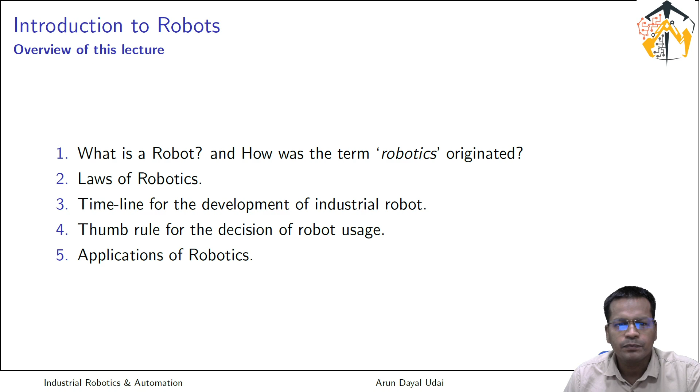Thumb rule for the decision of robot use is very important - when you should choose a robot, what type of robot for a particular application, this is covered in this module. We'll also discuss different applications of robots. So till module 5 we'll cover today, and then move further in the next class.

So what exactly is a robot? Where did this term originate? Most of you probably already know by now, given your curiosity. But formally, a robot is an automatically operated machine that replaces human effort, with or without human resemblance. That means your notion of a Star Wars type of robot falls here. With this formal definition, it may not look like a human at all - it can be just a human arm, or sometimes not even a single moving part, and that can also be a robot. It can be just a screen with some animated creature coming on it, like an avatar - that also is a robot.

Sometimes web bots are also there. With those definitions, it formally cannot be put into industrial robots as such. In industry, most of the physical things are there, so that definition may not be equally good, but yes, that is how a formal robot is defined.

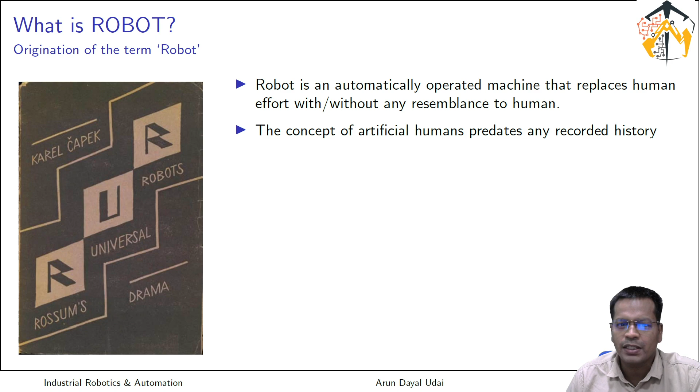Then comes the concept of the artificial human, which predates any recorded history. Actually, robots have evolved long back - it predates any recorded history, we don't even know when it came, probably in some old drama or somewhere. Formally, it has been documented that the modern term robot we normally use was derived from a Czech word, robota, meaning forced labor or a serf.

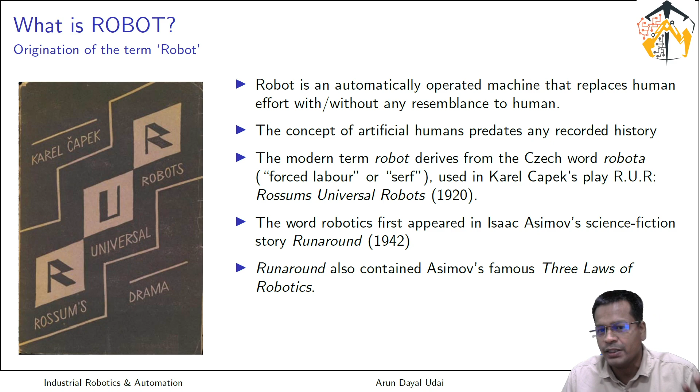It is used in Karel Capek's play RUR, that is Rossum's Universal Robots, a 1920 play. Quite a lot of inventions happen because of fiction stories, sometimes through drama, and that is how this was also conceived. The word robotics, not robot, first appeared in Isaac Asimov's science fiction story known as Runaround, which came in 1942. Runaround contained some famous laws of robotics, which were formally established and known as the three laws of robotics. So you see, a fiction work has given a formal definition finally.

So what are the laws of robotics? Asimov's three laws of robotics: first, a robot may not injure a human being, or through its inaction allow a human to come to harm. What does this signify? A robot's brain should be built such that - though commands come later - it should not injure any human around it. You cannot make a robot that kills a human, because then it doesn't fall under the category of protecting humans altogether. That is the first law.

Then comes the second law: a robot must obey the orders given to it by human beings, except where such orders would conflict with the first law.

This particular definition follows the previous one. That means a robot obeys human command, but if a robot is commanded to kill another human, it won't follow that. Or you cannot ask the robot to kill yourself. Commanding it to kill you should also not be accepted. Then comes the third law: a robot must protect its own existence as long as protection does not conflict with the first and second laws. It will protect itself, but while protecting itself, it should not kill the commander, that is you, the programmer maybe.

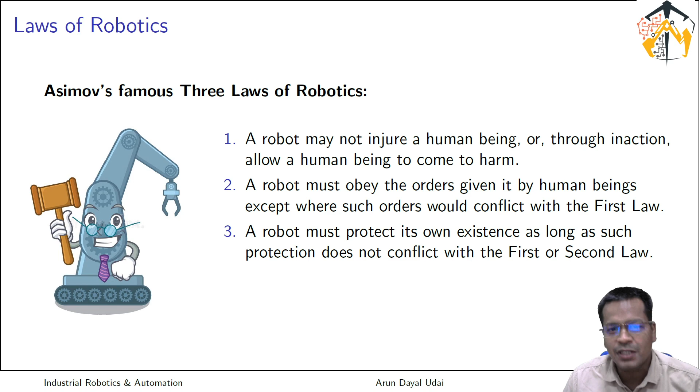Then comes the timeline of how it has evolved. The first stationary industrial robot, I call it a stationary industrial robot, looked like a robot the way it is in industry. I'll show one small robot here next to me. It doesn't look like a robot at all, more like a humanoid arm. It's just an arm, you can move it, it has some axes, it picks an object from a place and puts it somewhere else. This is how it is.

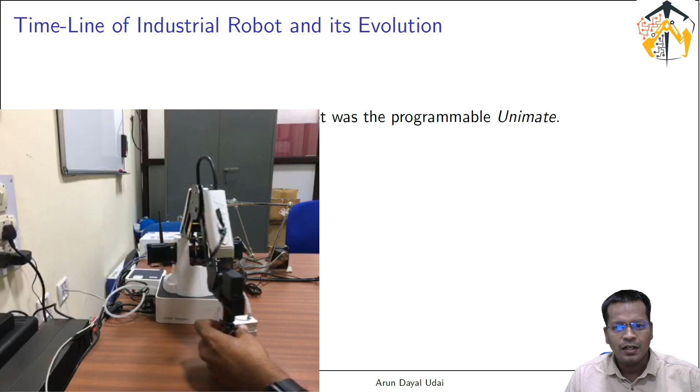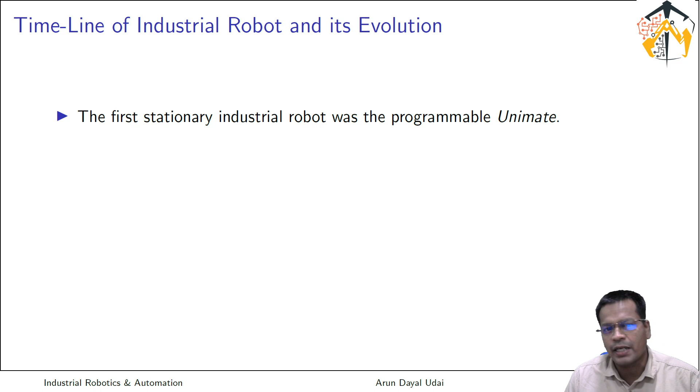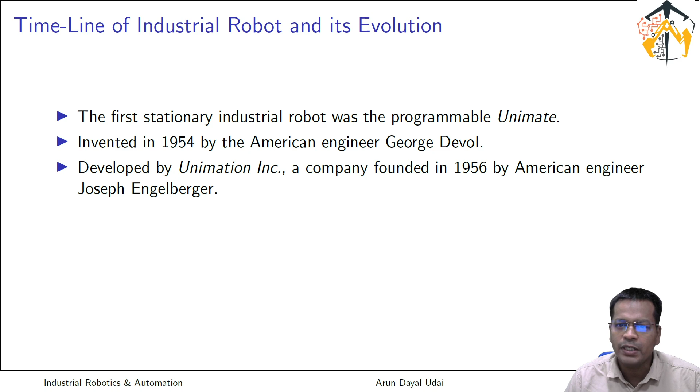So it is a stationary robot and it is programmable. The first one of this kind was developed by Unimate, a stationary robot very much like a human arm. It was invented in 1954 by American engineer George Devol. Later it was developed by Unimation Inc, a company founded in 1956 by American engineer Joseph Engelberger. So although Engelberger is known as the father of industrial robots...

This is not a mobile robot, not an underwater robot, not a drone. This is an industrial robot, mostly arms as it exists in industry. Nowadays it can take other forms, I'll show and discuss that as well. The first prototype of such robots was introduced in 1959 at General Motors Corporation as a die casting factory in Trenton, New Jersey. That was the first commercial one.

And the world's first production line serial robot - why is it called serial? It's just like our arm: it has a shoulder joint, an elbow, a wrist joint, some fingers. So it is serially connected and it terminates. It is not a closed loop, not a 4-bar mechanism, it is just a serial chain, an open loop chain, very much similar to that. This kind of serial robot was delivered to a General Motors factory in 1961 by Condec Corporation, which is nothing but an acquisition of Unimation Inc.

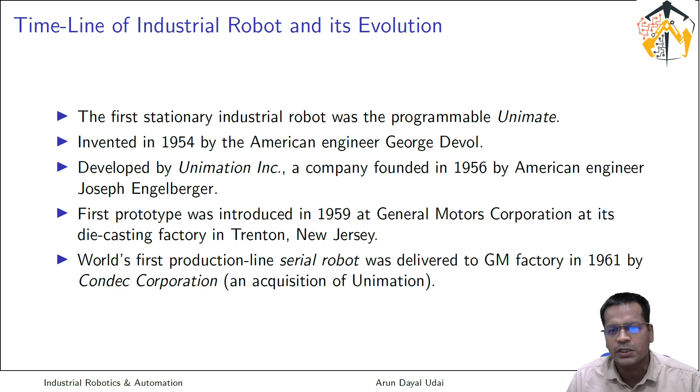So where should we apply a robot? These are well-posed questions quite often asked to us: where should we use this, can we use it anywhere we feel like, should we use it at all? Mind it, normally we prefer using robots for dirty tasks, any task which is dirty. These are known as the 4Ds.

Dirty means something very dirty, like a forging operation, maybe a machining operation, or sometimes in a casting factory, sometimes in painting. I'll show some applications also. Painting is a very dirty task - if you paint, you yourself get dirty. Buffing, polishing, and those types of tasks which are dirty in nature, or a dull work.

Dull work means as soon as you joined your duty, whole of the day you were just picking up an object from the conveyor, putting it into a carton, and moving it to another conveyor. So if you do such a repeatable task, what will happen to you? You will feel fatigue. Your whole day you did nothing but pick up an object and put it somewhere. That is a very dull task.

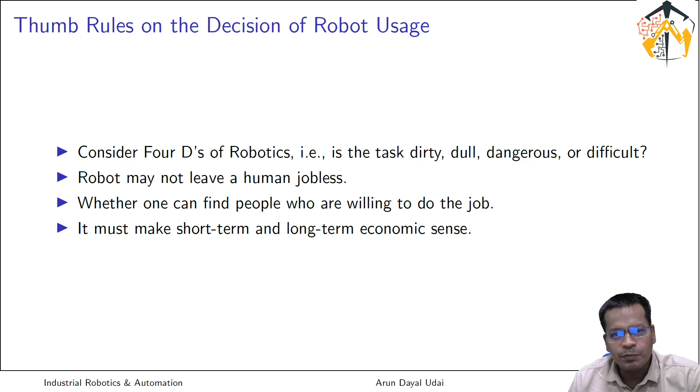And it must make short term and long term economic sense. That means immediately you are not paying hugely for that particular robot, or over the year you are paying for its maintenance. So, short term and long term, it should be economical to the industry.

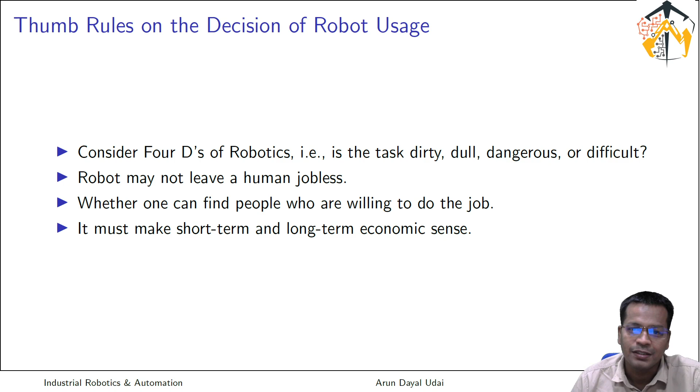It's not just precision which matters. Yes, it does matter - if it is so precise, then it is a difficult task, so it falls under the 4D category, right? So that is a difficult task.

Then I'll discuss some applications which are generally there in industry, without going much into general applications as a robot. I'll immediately show you a small video which shows some applications. This is a standard video quite easily available over YouTube, just one example. So you see, in industry it is used for...

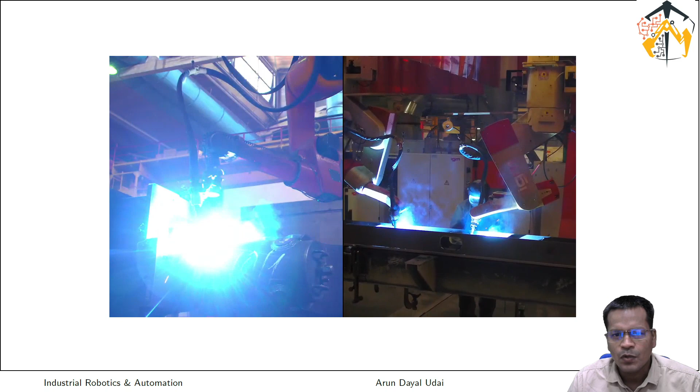Arc welding for precise, repeatable welding. Spot welding, where two plates are joined together or a frame is joined with the car chassis. Material handling - picking an object from a place and putting it somewhere else. That is what is being done here.

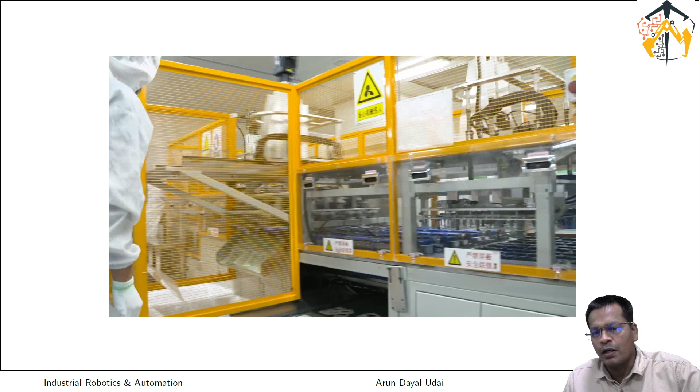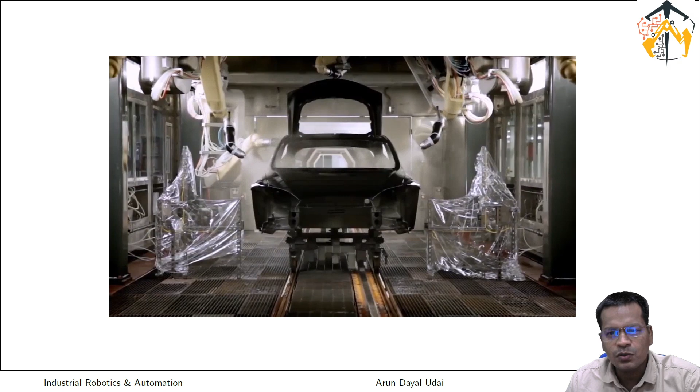Machine tending, yes - what happens is you pick a tool and put it to a machine which does machining. That tool can be placed as a cutting tool or something like that. It's a painting task which is done - this is quite common in industry. You see how dirty it is.

Picking, packing, palletizing - it's a repeatable task, and again it is very, very monotonous.

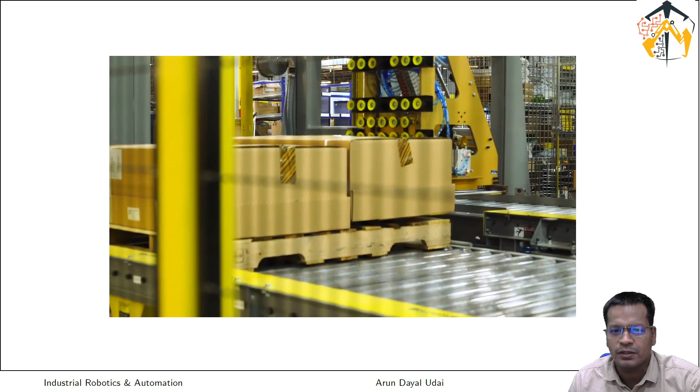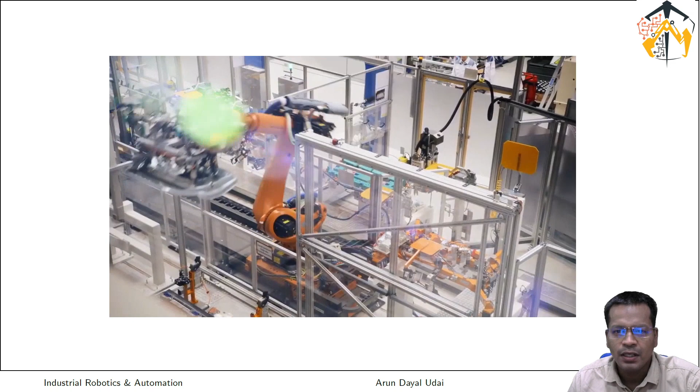Got it? This is palletizing task and assembly, one of the less seen applications in the industry. Assembly is when two or more parts are put together, probably welded or assembled using some fixture, laser cutting, and so on.

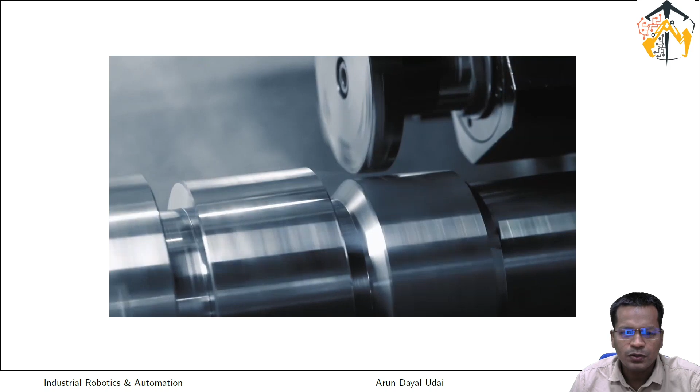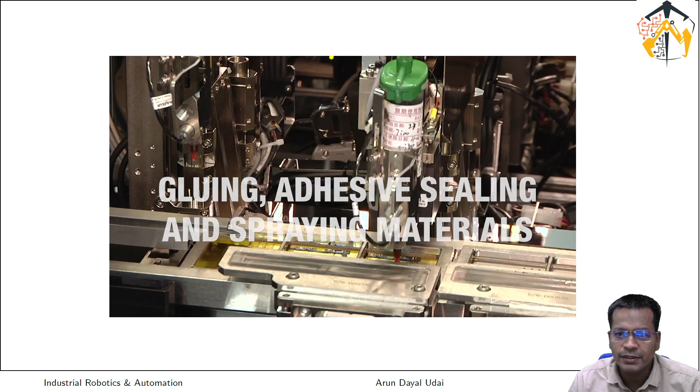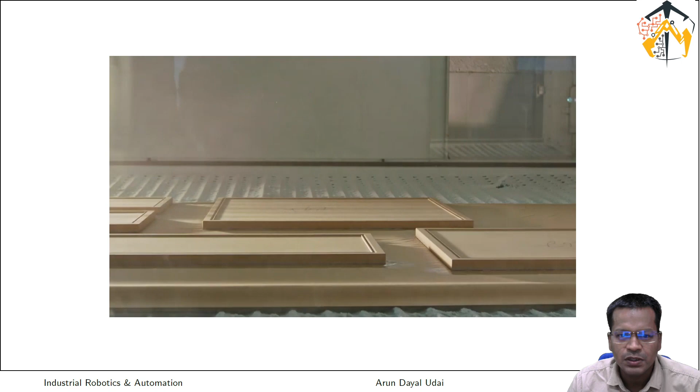These are some common applications in the industry: grinding, polishing, gluing, adhesive, sealing. They do it quite uniformly. This is spraying, and other processes are also there, like assembling in PCB.

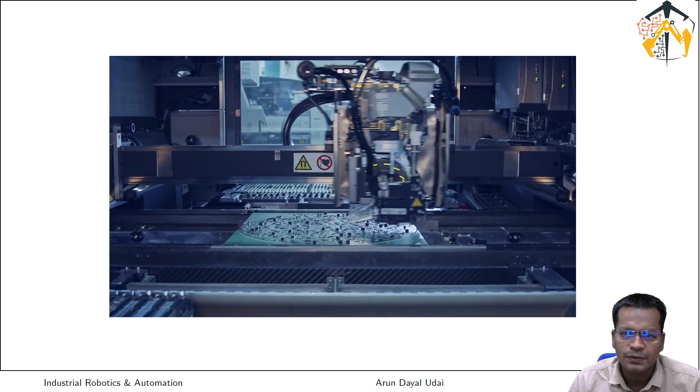While machining, it can do something. Yes. Electronic assembly, PCB assembly. That's all.

So these are some applications in the industry, primarily in the industrial shop floor. Otherwise, it can be used as medical robots, a typical example being the Da Vinci robot, which is very popular, though there are many others for specific purposes. It is also used in mining.

This is the Julius mining robot. What it does is pick up samples and do some surveying operations underground.

NASA space robot is there. Not just NASA, many other space stations have special robots. It has a huge boom, sometimes used to dock two space shuttles together.

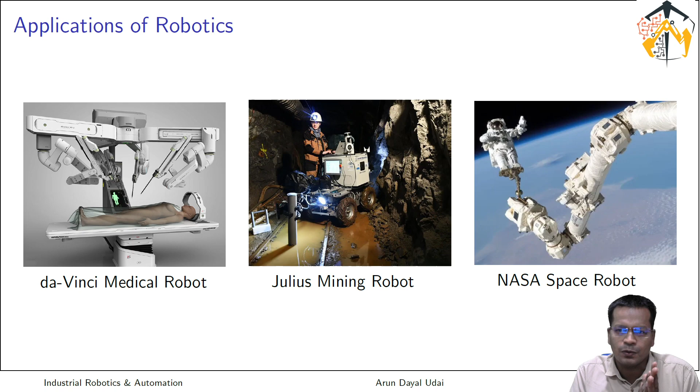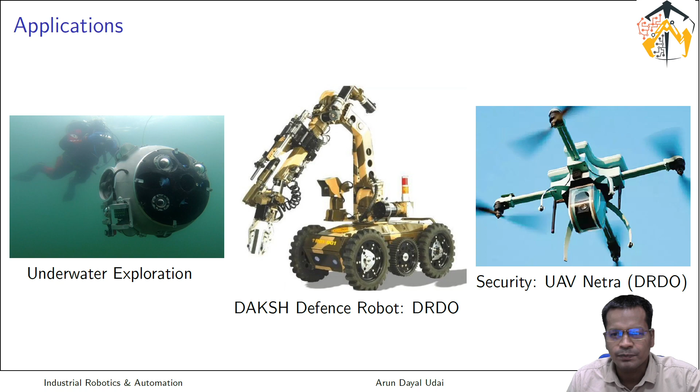It is used for defense, developed by DRDO, mainly as a bomb defuser. UAV Netra, maybe covered in some movies, is a standard drone-like creature which does cross-border surveillance. Both are developed by DRDO.

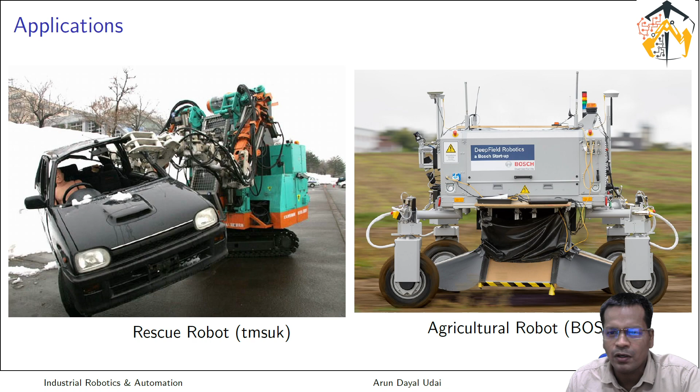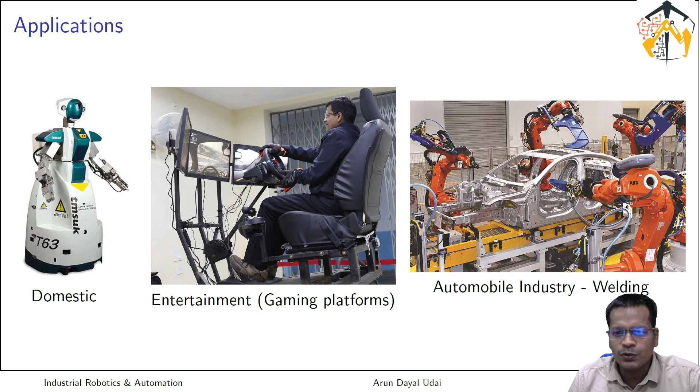In the automobile industry, just now in the video you saw it doing some spot welding operation. There are many more applications - material handling, palletizing, packaging, processing, welding (spot and arc), surface finishing like polishing, buffing, grinding, deburring, painting, machining and drilling, and assembling. Collaborative robots do assembling, which needs some compliance - a special category known as cobots, which has many other features. While doing kinematics and dynamics, we'll come back to this special type of robot for more insight.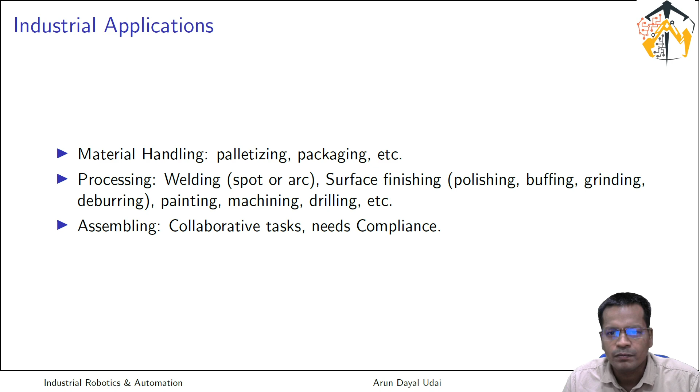Now I'll get into what exactly goes into defining a particular industrial robot, as you just saw. What all things make up an industrial robot? This is not just for a serial robot arm, it can be for any industrial robot. So how is it made up?

I'll switch on the camera once again for the serial robot. So it has an arm, number one, mentioned here. It is controlled using a bottom unit that you can see - this base has a controller. In industry it's a different setup, nomenclature as number 2, the controller, which has software inside. For a domestic or tabletop robot like this, everything is there down below. Got it?

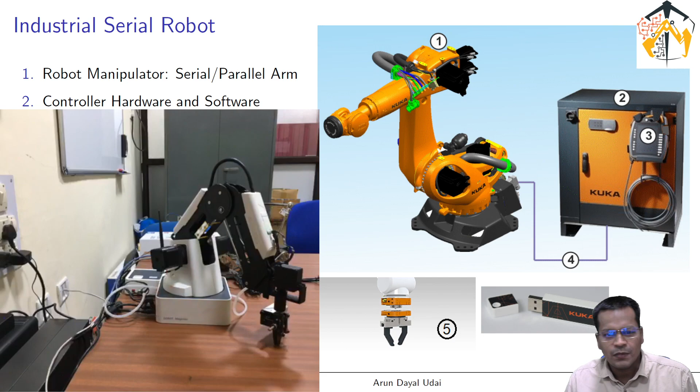Then comes the controller, and on top of this there is a teach pendant. What is it used for? It is used to program a robot.

For domestic robot and tabletop robot, programming can be done using a desktop PC, but in case of industrial robot, it is a teach pendant. It has a long wire which can be dragged till the robot end effector, and then you teach it. You take the robot to a place, teach that location, then teach another location, and trace the whole thing. That can be done. It is used for teaching, sometimes for programming also, jogging operation, calibration operation, testing operation, everything can be done using that particular thing. We'll talk about teach pendants in detail later on.

And then it is constructed. Sir, suppose the equipment has a joystick attached to a teach pendant, that can be considered as- yes, it is normally attached. I'll show you my teach pendant in detail just after this slide. Please wait. So that has a 3D joystick, a 3D mouse type of thing, which is used to jog your robot.

It jogs to XYZ roll pitch yaw, three translation and three rotation - that is a 6 degree of freedom mouse. So that is always there with the teach pendant in the latest thing. Okay, so that is there.

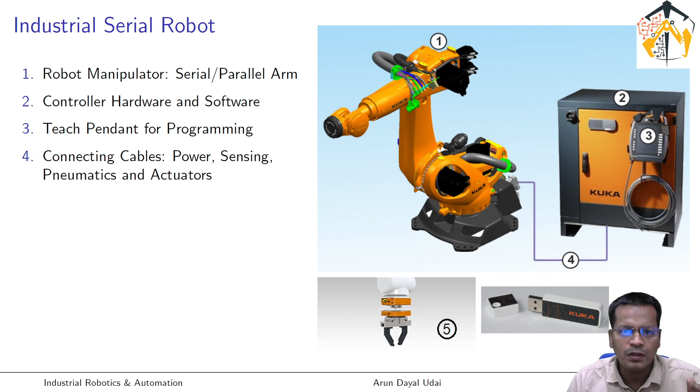Connecting cables connect different things together. It connects the sensor, it connects the power, it connects the signals. So those are connecting cables.

It can be a pneumatic cable also, which supplies pneumatic supply to end effector. Professor Jaffer will discuss much more in detail while he discusses pneumatics and hydraulics during the automation portion of your syllabus. We'll talk back to this when we see how things are integrated together in pneumatics and electronic things. The robot here is electrical electronics, but quite a lot of things are compliant, and those things are pneumatics. He'll talk in detail, don't worry, he'll come back to this.

So you also have some pneumatic cables. That also is there, and you have plenty of actuators which need power, which have signals. So those things are there.

Number fifth is end effector tools. End effector tool can be a polishing tool. Just now you saw in the video, which can do polishing, which can do grinding, it can do spot welding. So tool differs from application to application, right? Over here in fifth number, you see it's a two-fingered gripper. Just a two-fingered gripper, it has nothing else. So that is known as end effector tool.

By default, robots are not delivered with that tool. It is delivered just with a flange. You can attach different types of tools depending on application to application, right? So that is what a tool is.

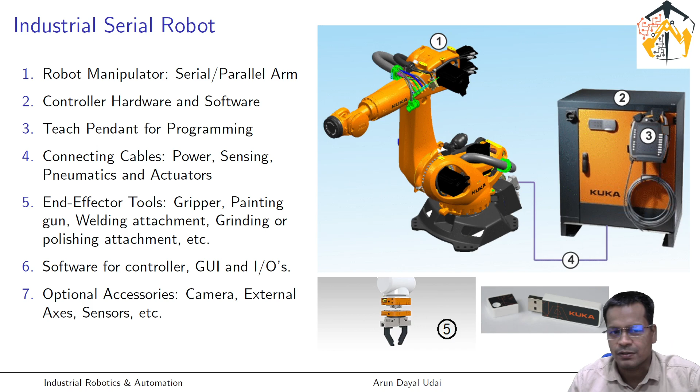That can be done. Sensors, external sensors can be there, it can be a proximity sensor if you want. Nowadays plenty of sensors are there by default. Some are implicit to the robot, some are explicitly attached, like safety sensors. Your robot is in a cage, normally in industry, so as soon as you enter that cage, the robot is slowed down or stopped completely. That is through an external sensor. These are optional.

Now I'll discuss in much more detail what things are there. So just now I showed you a few.

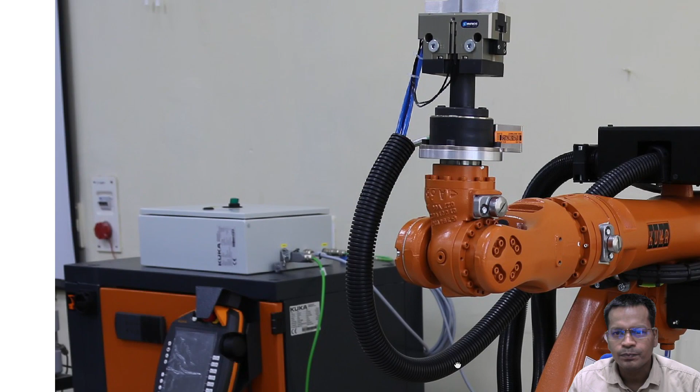This is a two-fingered gripper, a Schunk make. It is attached on top of a robot flange, but there is something in between - this is a load cell. What can it do? It can feel the forces that come on the gripper. This is not a regular attachment, this is for a special purpose robot. It looks like this.

And then these are the actuators, rather the motors. Motor with the gearbox and transmission is known as an actuator. We'll discuss actuators in much more detail in the next module. This is the top box where you have some valves fitted.

The blue wires, all the blue lines, are pneumatic lines, so this is a pneumatic gripper. All the valves to operate the pneumatics are over here, whereas the black cables you see are electrical cables. And the green cable here is the communication cable. So each cable has got some color coding.

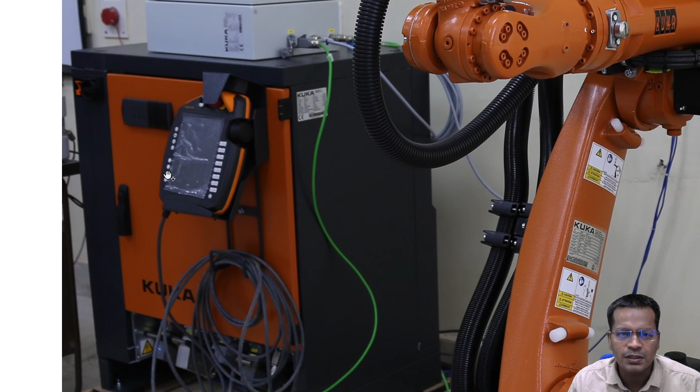This is your controller, a standard industrial controller. On top of this is a teach pendant - I'll show you in much more detail once again. This teach pendant has an extension cable. So now I'll expand on this teach pendant.

Just now you saw that, I'll show you what you just asked. This is a 3D mouse, used to jog the robot in 3 translation directions - X, Y, Z - and rotation along those 3 axes. So this is nothing but a 6-DOF mouse.

This is the emergency stop button. This is the mode change for programming - for regular run you can change it. Standard programmable buttons - it can be a fixed programmed button that comes along with the GUI, so a few of them can be programmed buttons.

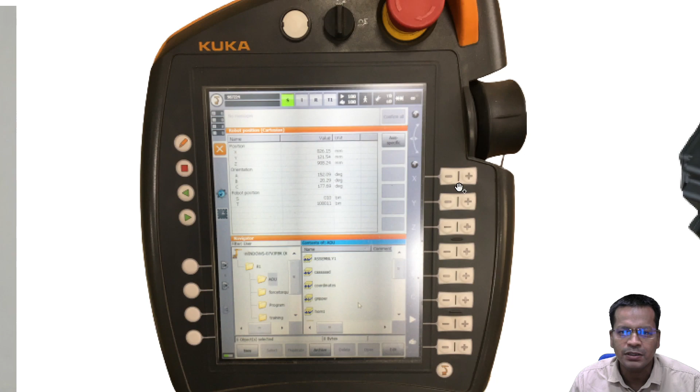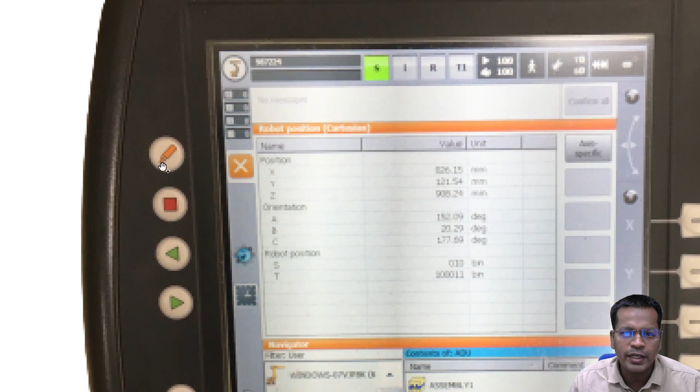It shows X, Y, Z, plus minus, plus minus, plus minus - it is very much like this. And then code editing, stopping, running code backward.

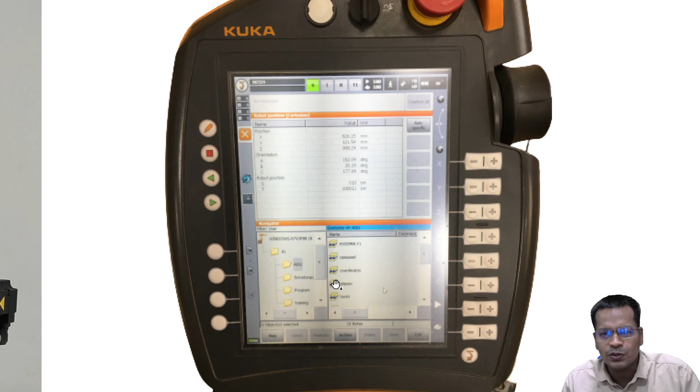It shows some information, very much like a computer display. It is nothing but a replica of the PC sitting inside the controller, so it's just the same screen. It can even show the directory structure of the files that are there - these are your codes, your computer programs.

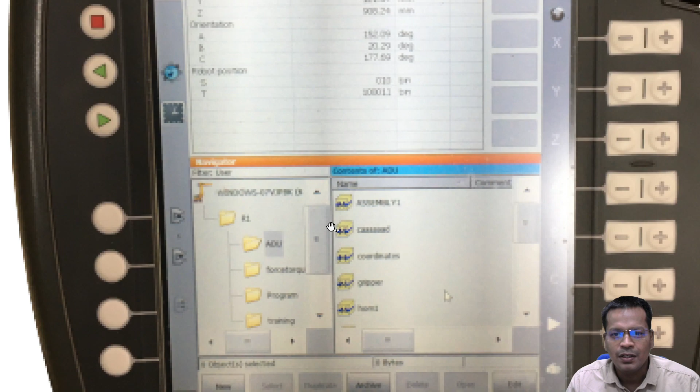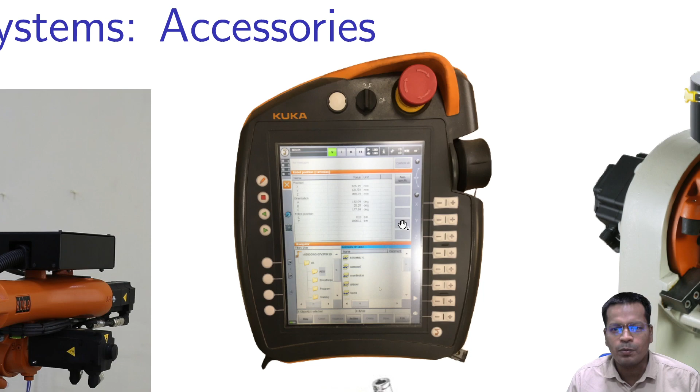These are some of the programmable buttons. So now you see in detail how a teach pendant looks, and at the back of it, it has some safety switches. If you grab it, only then will it run. If you throw it off, it will immediately stop the robot. I'll show you that picture as well sometime later.

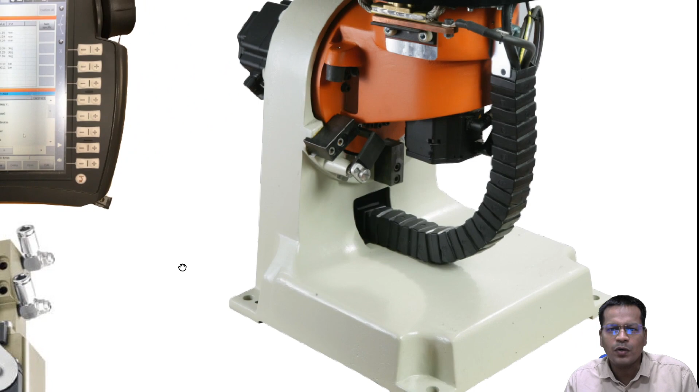This is a standard two-fingered gripper, this is how it looks. It has some pre-built sensors which tell the robot whether it is closed or open. This is an external accessory, an external positioner, where you can mount an object, fix it over a vise, and this motor runs synchronous to the whole of the robot.

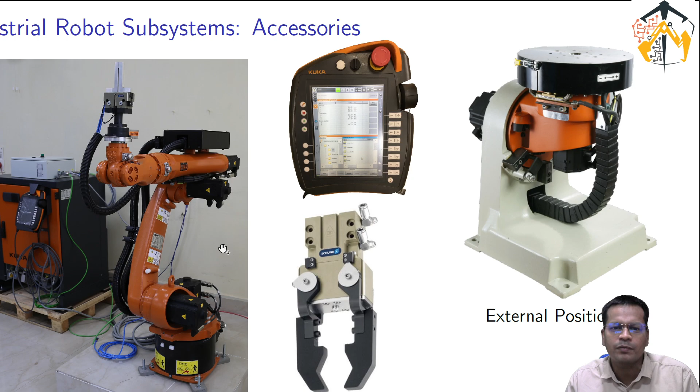So this is there, not always - this is an optional accessory that can be there. So this is how a typical robot and its subsystems would look like.

This is an industrial robot, an arm, a serial robot. It can be a parallel robot also, but the controllers that I have shown you have a similar structure, the same type of things will be there. Even if it is a parallel robot, it will have a gripper, a controller, and can have a teach pendant. Teach pendant is not always mandatory.

Once the robot is programmed, you can take it out and put it on another robot which is not programmed. In an industrial assembly line, you find more than a hundred robots all one by one, just like you saw in the video. So you can program one, take out the teach pendant, put it on the other one, modify the code. Once the coding is done, you no longer need it. So all of them can be interconnected through automation systems, and then all can be synchronous, all can perform a job and do multiple things. We'll discuss this in much detail.

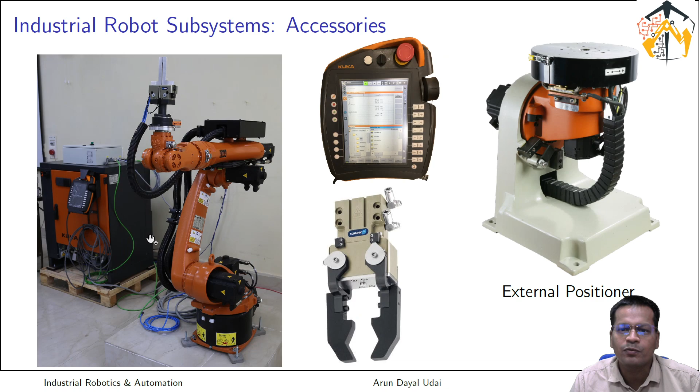So this is how this controller box looks like when it is open. What do you see here? This might have taken your attraction first. It looks very much like a PC. Yes, it is a PC. It is nothing but a standard personal computer, but it is ruggedized to industrial standards. It is IP protected, maybe dust protected, vibration and temperature protected, and it is very, very rugged.

Some IOs are there, standard monitor cable, networking cable you can see. It has some special cards which are there to do communication with the servo drives and servo motors that you could see on the robot. Those motors are run by these servo drives, and there are some safety circuits and control circuits.

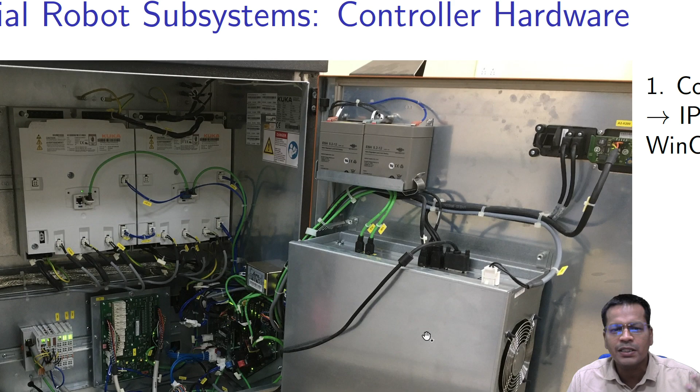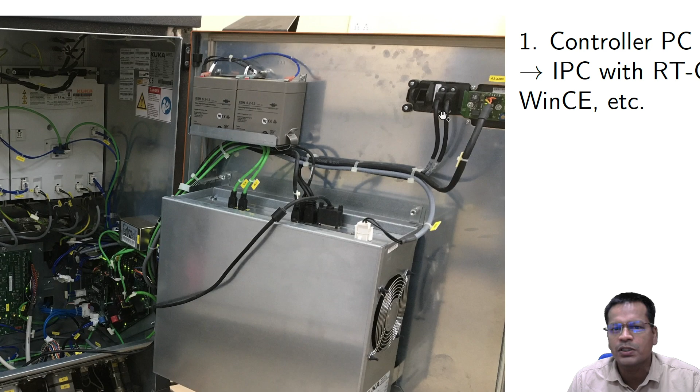This is standard industrial IOs, input and output system, which you could see. And this is a standard UPS, so that when power failure happens, it allows this robot to automatically shut down in safe mode. It doesn't do any disaster, right? It saves all the current location, shuts down safely, and this is the connection for external switches that you have seen. So this is what goes inside a standard industrial robot controller.

So this is which is there in the controller. It has an IPC, industrial PC, with a real-time operating system like VxWorks, Windows CE embedded, and so on. There are many others, it can be some proprietary OS also. It has a servo drive, as I have shown you, these are the servo drives. Backup battery you have seen just now.

Input and output module, this is here. This is to control the grippers which are there, if it is electrical or pneumatic. That is to operate the valves if it is pneumatic. If it is electric, it can directly switch on the solenoids or something like that. Sensors, that is to take the data from the sensor also, you need an IO card.

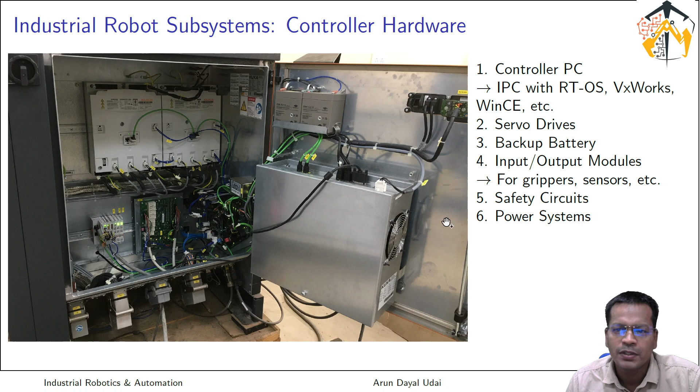Safety circuits, power system - it has a power system. Normally they are a part of this also, because you may have a three-phase supply which is converted to DC, and DC again converted to synchronous AC control, so that you run it - that is not much required for this particular course, but is required to run any AC synchronous servo motor. So it has an inverter type of drive. Power system is there, cable connectors definitely are there.

All bulk cable connectors are here, all IOs, so that this cabinet remains sealed. No dust can get in, even ingress protections are there - dust, sometimes water also, some paint spray, it can be located where you have plenty of paint sprays. Data communication wire - Profinet, DeviceNet, Profibus, EtherCAT - these are some standard industrial communication systems. Over here it is a standard EtherCAT connection which you see, the green wires, these are communication, very much like Ethernet. What is there in your computer, RJ45 cable, this also runs on RJ45.

If at all you feel difficulty in getting anything, you can get in between.